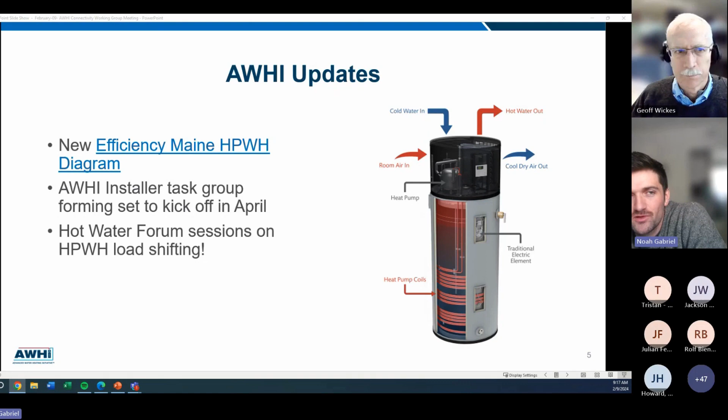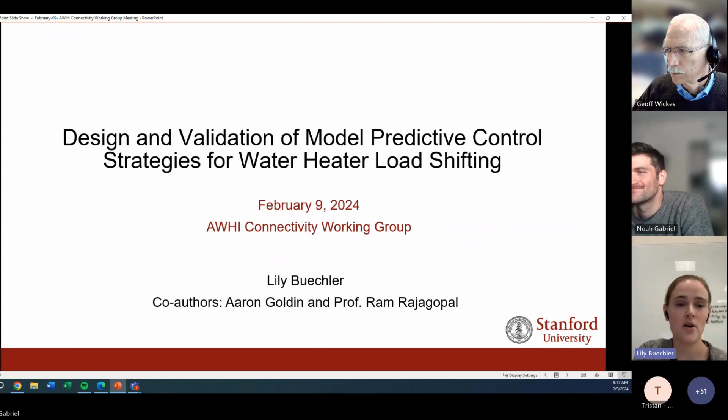Awesome, sounds good. So yeah, my name is Lily Buechler, and I'm a graduate student at Stanford University in the Department of Mechanical Engineering. And today I'm going to give a quick overview of a research project which is focused on using a specific type of control strategy, which is called model predictive control for water heater load shifting. Next slide.

So in this work, we're really focused on control strategies that allow individual water heaters to respond to time varying electricity prices using a strategy called model predictive control. And model predictive control, or MPC, is different from many load shifting strategies being used today in that it's an optimization-based approach. So this controller is essentially solving an optimization problem to figure out how to best shift load to minimize costs while also respecting things like thermal comfort.

One of the benefits of MPC over other load shifting approaches is that it's a predictive controller. It can anticipate how electricity prices might change in the future, anticipate how a user might use water in the future based on forecasts, and then make decisions accordingly. Because of this, MPC can be really effective at dealing with more complicated load shifting scenarios, beyond just simple time of use pricing, where load shifting can be pretty straightforward.

So in the future, if we have dynamic pricing, or if we want to optimize around other continuously varying signals, like carbon emissions, then we need ways to automatically translate those continuously varying prices or signals to control actions that also account for water heater demand for an individual consumer. MPC is basically one approach in order to do that.

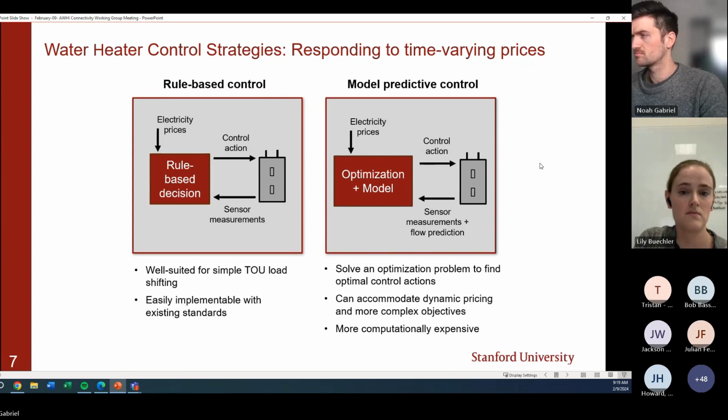So this is just an overview of how an MPC strategy could be implemented on a water heater. The main idea is that the controller is solving an optimization problem to find the optimal heating schedule, which reduces costs and maintains thermal comfort for the consumer, given different pieces of information. That includes things like time varying electricity costs, as well as a model of the tank thermal dynamics, basically a model saying how the tank temperature is relating to heating and water draws.

It also uses temperature measurements from the tank, as well as forecasts of what water draws are going to be in the future. The outputs of that optimization problem is essentially a sequence of on-off control actions for the heating elements or the heat pump, depending on the type of water heater. This is an algorithm that would repeat iteratively, say every 10 or 15 minutes or so, where it would measure the water temperature, forecast future water draws, solve the optimization, set the control actions, and repeat. Next slide.

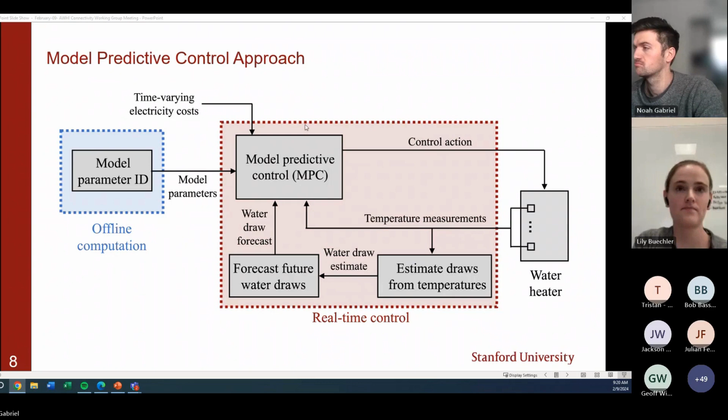That optimization is subject to different constraints, which ensure thermal comfort and encode different characteristics of the water heater, such as the amount of power the elements can consume or the heat pump, and a model of tank thermodynamics, which models how tank temperatures relate to power consumption and water usage. Next slide.

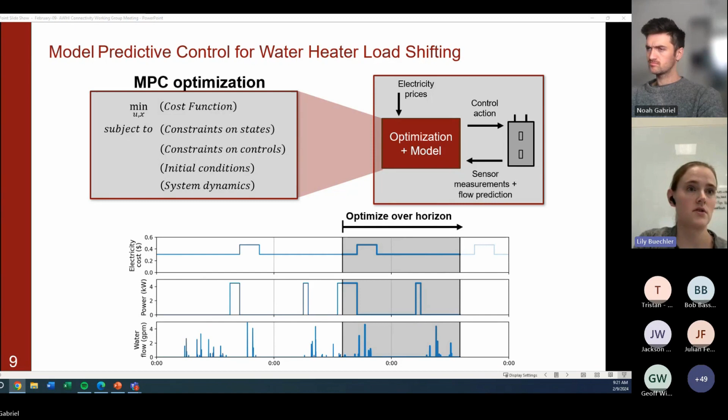So what we found from our lab testing is that there are two important design choices which can really affect how well a control strategy like this performs on actual tanks. One of them is which model you would choose to use of the tank thermal dynamics in this optimization problem. This model is essentially telling this controller what the current state of charge of the tank is.

And how that state of charge will evolve in the future based on control actions and water draws. In the past, previous studies tended to use really simple models that ignore real world tank stratification. Most water heaters are thermally stratified, meaning there are different layers of temperatures of water in the tank, but accounting for that stratification in an optimization-based controller makes the problem a lot more complicated. So we wanted to understand how much this model fidelity really matters, how it affects control performance, and what that trade-off is with computational costs.

Another important design choice is how you forecast future water draws. In a lot of water heaters, you probably aren't going to have a flow meter which actually measures the water draws, so you would have to estimate them based on other sensor measurements, like temperatures. We analyze the best way to do that.

In terms of forecasting future water draws, you want a controller which is really robust to wrong forecasts, just because water use patterns are very variable. So we wanted to understand how variability in water use patterns between consumers, and for the same consumer, can affect control performance. In this project, we tried to answer some of these questions by comparing different model predictive control strategies through laboratory testing and simulations.

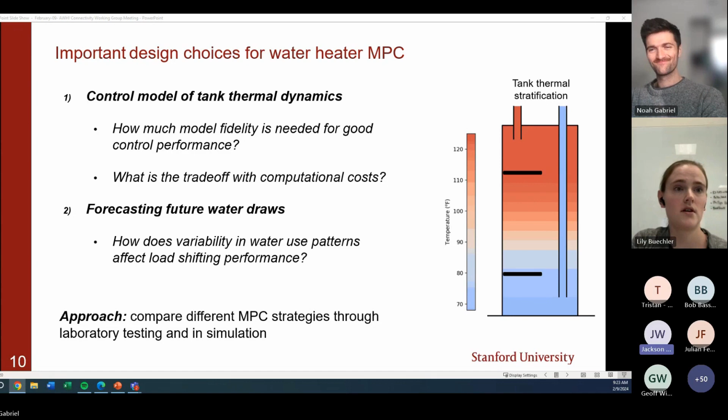This setup lets us run long-term tests using basically any control strategy that we want in a very controlled environment, so we can compare the performance of different controllers using the same exact draw profiles. We also evaluated different control strategies in simulation by calibrating a pretty detailed model of tank thermodynamics to our lab measurements, which lets us test a much larger number of control strategies and scenarios.

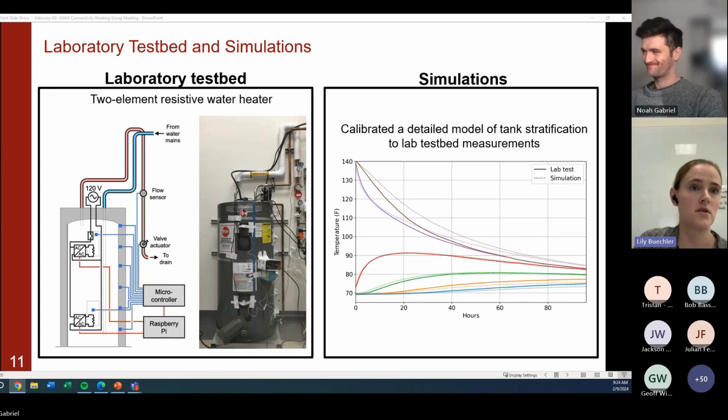The first question we tried to answer was, how does model fidelity affect model predictive control performance? For this, we compared 3 different controllers: a baseline controller, which is just doing thermostatic control using no load shifting, and then a model predictive controller which uses a super simple model of tank thermodynamics, essentially assuming the tank is fully mixed at a uniform temperature, which obviously isn't accurate, but is the most common approach used in studies that have tested MPC strategies in the past.

We then compare that to a model predictive controller that we developed, which uses a model that very coarsely accounts for tank stratification while still being pretty computationally tractable. It basically splits the tank into 3 different regions. We chose this model specifically for 2-element resistive water heaters and the types of stratification patterns you can see in these tanks. Next slide.

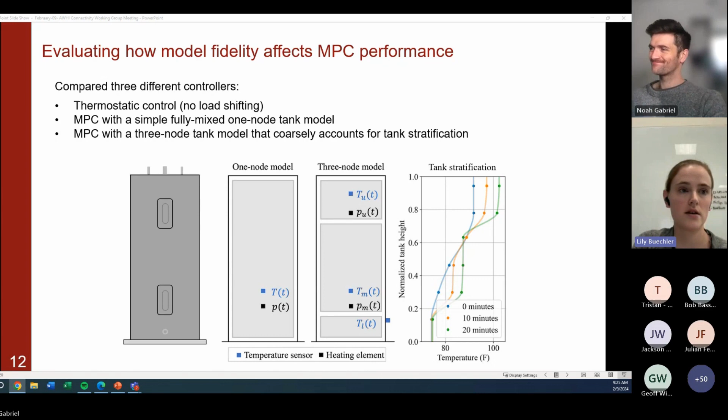We ran a set of laboratory tests comparing these different controllers, where each controller was tested on 3 different water flow profiles with very different daily water usages. That's a total of 9 different tests, run each for 4 days. For these tests, we assume the controller has perfect knowledge of future water patterns, just so we can analyze the effect that the controller design and model has on performance.

The controller optimizes over a 24-hour period in the future, so it has access to 24 hours of future prices and forecasts of water use patterns, and updates every 10 minutes. We use the time-of-use profile, which has a peak window from 5 to 8 p.m., coinciding with a lot of the water draws in this data set.

We saw really similar results between the lab tests and simulations in terms of energy consumption, temperatures, and the timing of when the water heater turns on and off. We also saw similar energy consumption and efficiency across the controllers, which is what we'd expect, since this is a resistive water heater where the efficiency is relatively constant.

For those previous tests, we assumed controllers have perfect knowledge of future water use, and in practice that's never true. Often we can't even directly measure water flows unless you have a flow meter on the water heater. But we found that you can pretty reliably estimate historical water draws just using power and temperature measurements, as long as you have a decent model of the thermodynamics, and then use those estimates for forecasting future draws.

In terms of integrating these forecasts into the control strategy, one thing we've learned is that over-predicting draw volumes is far better than under-predicting, in terms of both thermal comfort and load shifting. If you use conservative forecasts that overestimate water draws most of the time, that can be pretty effective at preventing runout events.

So what is actually needed to implement a model predictive controller on an actual water heater? In our proposed implementation, we use 3 temperature sensors and 2 power measurements, one for each element, but we don't need a flow meter. Every part of this architecture, from learning these models to forecasting future flows to solving the optimization, can be done with just those 3 temperature measurements and 2 power measurements.

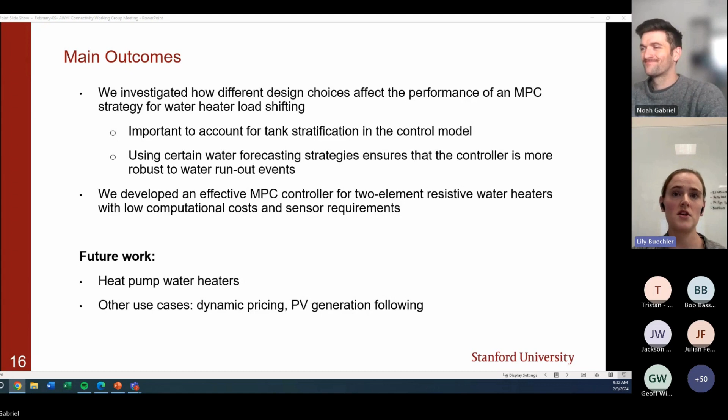In the future, we're hoping to look more at heat pump water heaters, as well as other use cases like dynamic pricing or PV generation following.

If you're interested in learning more, we just had a paper accepted to IEEE Transactions on Smart Grid, and there's a preprint available on arXiv. If you're interested in more technical details, feel free to check that out. I just wanted to acknowledge my co-authors and funding sources, and we'll be happy to answer any questions.

It was over a few days. So these laboratory tests that we ran—yeah, this slide, right, this was over, I think, 2 weeks or so. The previous slide was over a few days. The first set of tests we ran were pretty short, and then the next slide we were using a data set that was a bit longer, so I think this might have been like 2 weeks or so.

I think one thing we've struggled with is getting a large amount of flow data from actual homes that we can run realistic studies with. We've gotten some data published in other papers, but they're typically a couple months long. So if anyone has suggestions on data sources spanning like a year for a lot of different homes, where we could look over a wide variety of consumer use patterns over a longer period of time, that would definitely be helpful.

You'll get a lot of that at the water forum, Lily. You can talk about draw patterns the whole time you're there if you want.

That's good feedback though, that when you look at this, if that's a relatively short period, then your opportunity for payback on a fairly marginal technology investment looks promising.

For these time of use rates, the reduction—I think this was for a PG&E rate—is 20 to 30% from load shifting are the savings you can get, using a profile where a reasonable amount of consumption is in the evening, coinciding with that peak period.

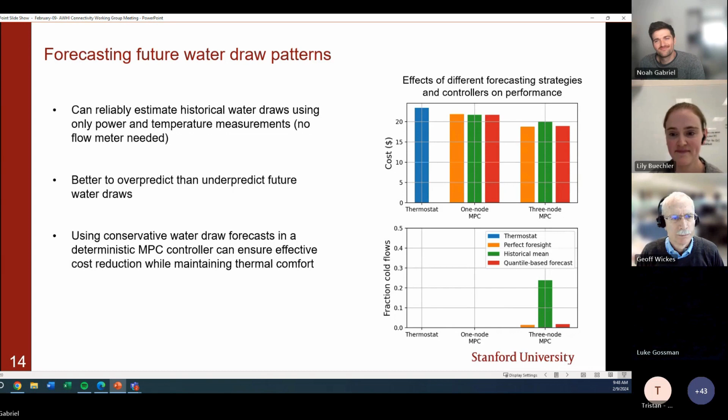And Lily, this was great, thank you. I think it's the kind of stuff that everybody's curious about. They love having other people do some of this great research, and especially if it's open source, it really helps. Yeah, thanks again, awesome.

So yeah, just open floor time. If anyone wants to raise any points about upcoming things related to advanced water heating, now's the perfect time. And we're not wed to staying the whole time, so if we end early, we end early, and that's all good.

And don't have much in the way of next steps either. I'll just say that I'm definitely excited for upcoming conferences like the Hot Water Forum, and it should be a great time to keep seeing more cool presentations.

Tristan, you have something? Just a brief one, since ending early sounds good. So maybe next time we can bring up all the efforts being done to get commercial water heating going. There's an AHRI 1390 group that's trying to do commercial grid signals and connectivity to HVAC.

And I've been trying to participate and help. I think HVAC is so much more complex, especially at the commercial level. Does the thermostat provide enough, or do we really need to get signals to the equipment? So super complex, whereas water heating, large commercial heat pump water heating, especially when the residential load profile is in place...